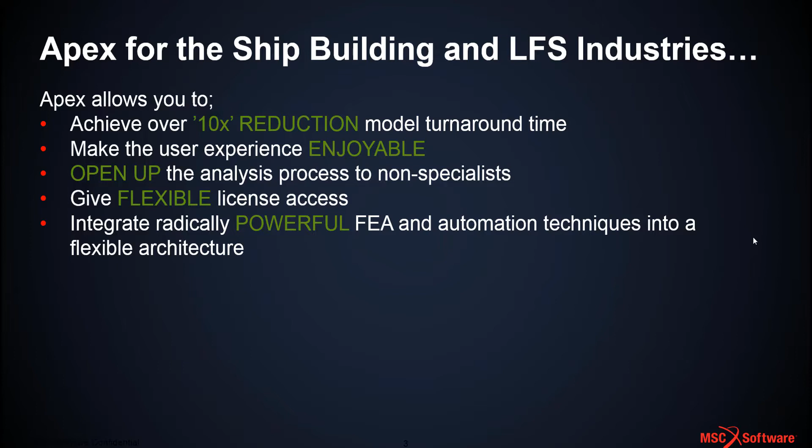There are many patented technologies in Apex and a rich suite of scripting, customization and automation technology available through the flexible architecture. These capabilities are very prevalent in the model build, analysis and general FEA requirement across shipbuilding and the large fabricated structure industries, hence the importance that robust FEA has within this development process.

That said, Apex gives you the design freedom to develop your current and future products in a manner you have never seen before, mainly focused on the power of Apex coupled with the massive efficiency gains that you can get.

So the Apex journey so far: the original releases were based on CAD to mesh, so easy to use, faster to build models and faster to update models.

Then with subsequent releases we moved into the ability to go from CAD to results by relying on the embedded Apex structures solver technology, which allowed us to go round the design iteration loop to build and analyze your products quicker.

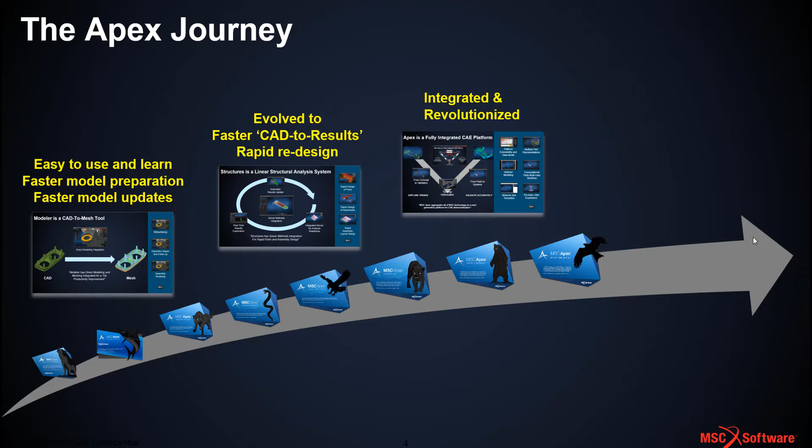Then with later releases we saw the introduction of the Python application program interface, the API, which means that Apex is now fully controlled and customizable through that Python automation.

A subtle change in the messaging or push for Apex has been to change the paradigm from the embedded Apex structures solver to the MSC Nastran external solution by the Apex Nastran gateway. A number of interoperability enhancements are all enabled through the MSC Apex Iberian Lynx release.

So workflow maturity: legacy approaches looked at other tool sets, so Patran or third-party tool sets for both pre and post processing, wrapped around the MSC Nastran process.

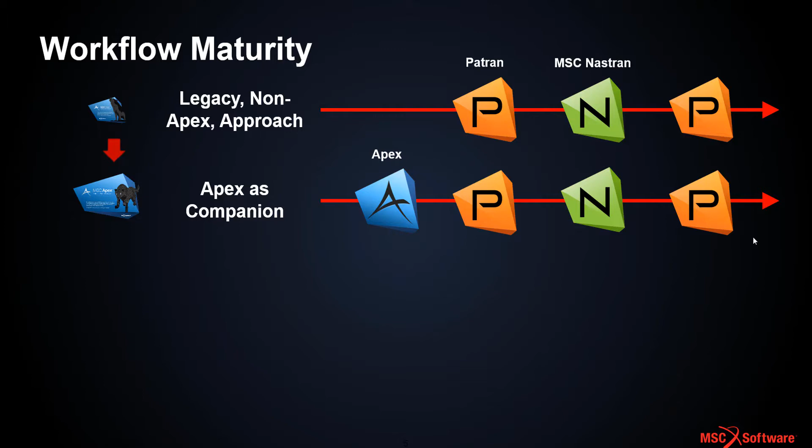As Apex came along, it was originally used as a companion tool to allow Apex to build models in a partial sense, for then import into Patran or a third-party tool for continuing pre-processing, then Nastran, then external support for post-processing.

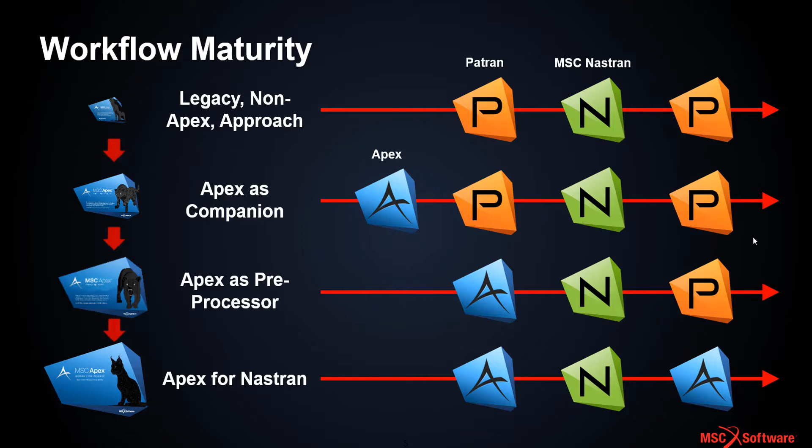As Apex has evolved, it's now, or has been, a fully defined pre-processor, but still relying on Patran or a third-party tool to do post-processing. But now with Iberian Lynx we have the concept of Apex for Nastran, where we can build and explore our results, post-process Nastran all in a single wrapper environment without the need for anything else.

So functionality growth: as an original companion tool, we had some level of keyword support which has grown in subsequent releases. We've had Apex as a companion tool where we can set up the jobs and solution types for external Nastran post-processing.

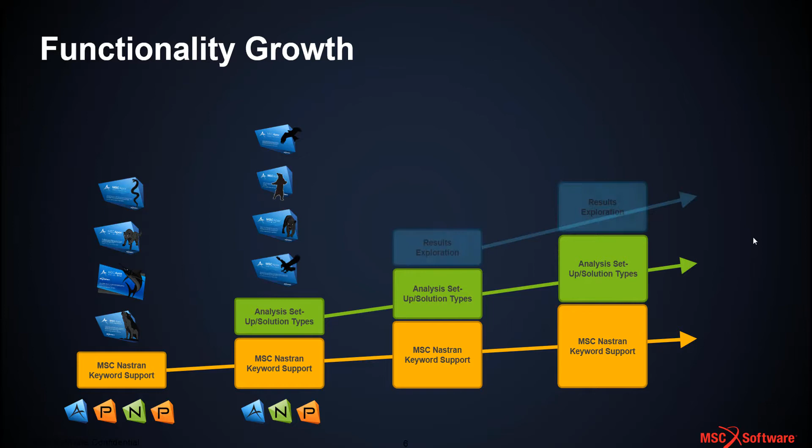The advent of Apex Iberian Lynx has meant that we are now fully supporting results exploration, so we can post-process Nastran result files and result data in a single Apex environment.

We've also got the ability to deal with orphan mesh, which means we can now take legacy Nastran bulk data files, read them into Apex, manipulate and modify them without the need to rebuild from the original geometry.

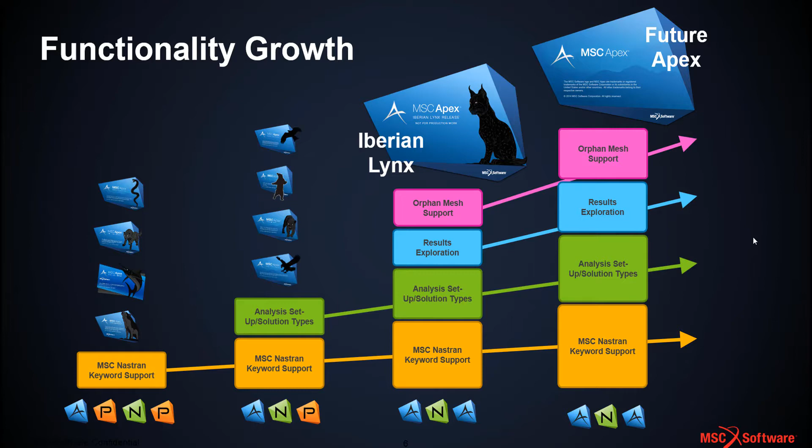And as Apex develops into the future, with a couple of service packs and another significant release planned over 2019, we've got a lot of technology coming in which will further improve these functionalities.

So how can Apex improve your productivity? The key thing now is that Apex is implicit within your MSC Nastran workflow, so you don't need to rely on anything else in terms of your model build for the bulk of your FEA development process.

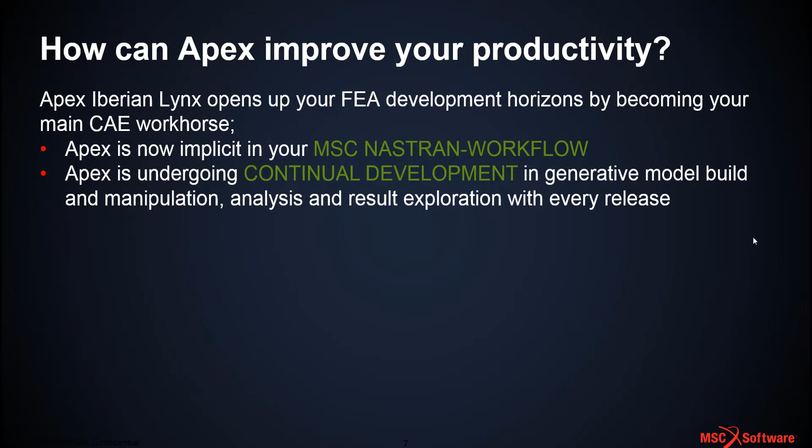It can become your main CAE workhorse. Apex is undergoing continual development in terms of model build, analysis and result exploration with every release.

The Python-based automation now supports build, but also analysis and result exploration, which is new to Iberian Lynx. We've also got the ability to customize the graphical user interface through a user-defined tool, enabling the user to develop and access their own form and graphical user customization.

Apex's current and future development is driven by a desire to address the key industry pains that we see with contemporary development environments, allowing you to experience the full benefit of an Apex-focused workflow. Let's get started with a couple of examples of some shipbuilding and large fabricated structure analysis, some build types.

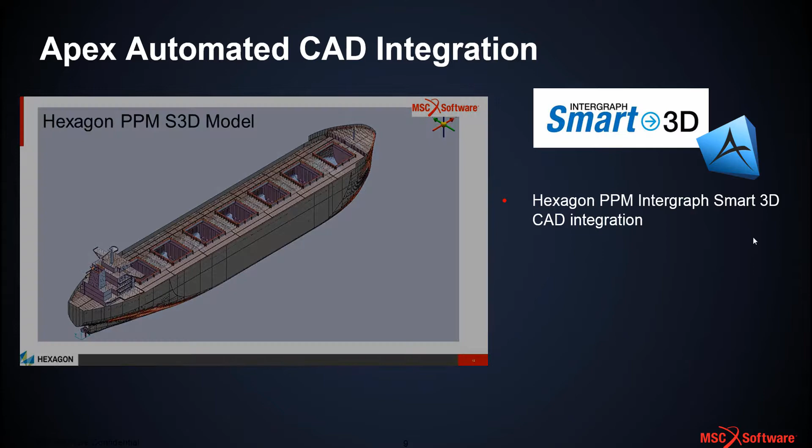So let's get started. Looking at Apex automation, we've got an example here where Apex has been automated with CAD integration. The Intergraph Smart 3D tool, the geometry CAD tool, is now fully built into Apex with a Python automation. We can now read in geometry via a Python script.

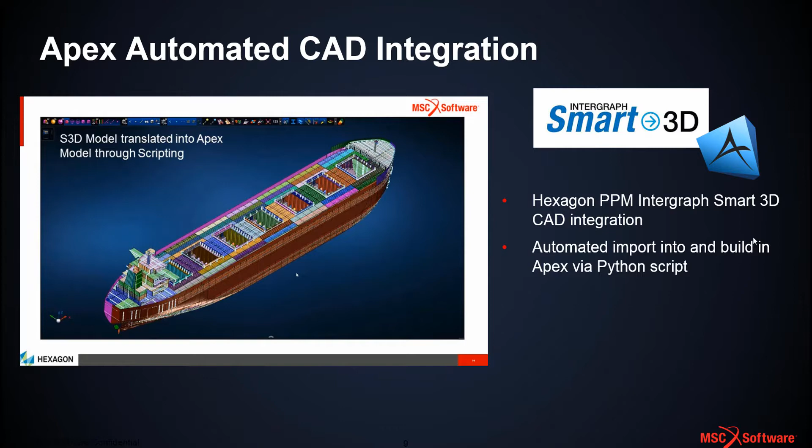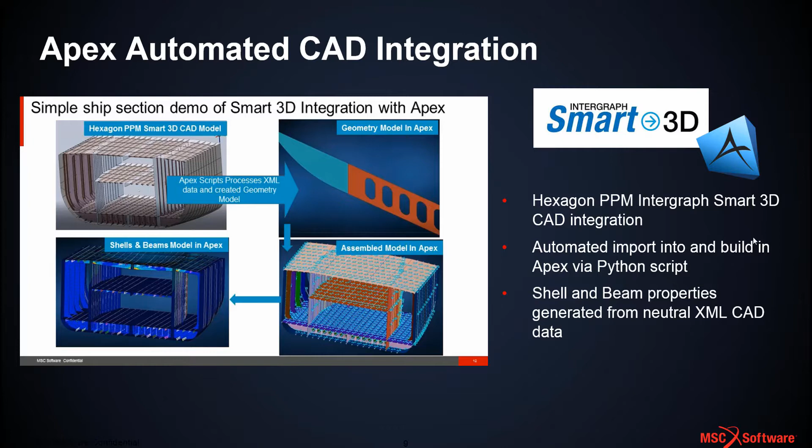We can develop our shell and beam properties from a neutral XML CAD file direct out of Smart 3D, which means we can build geometry, assemble that model within the Apex environment, and then run our analysis for subsequent linear static and buckling analysis. So the movie playing on the left hand side, we can see how the geometry is read in and manipulated.

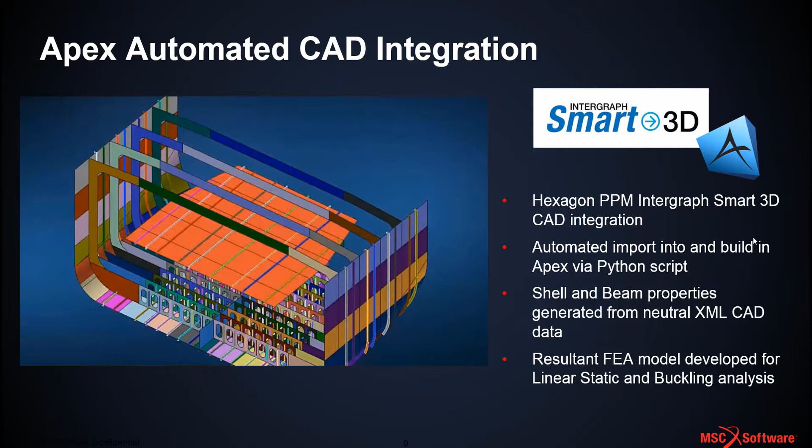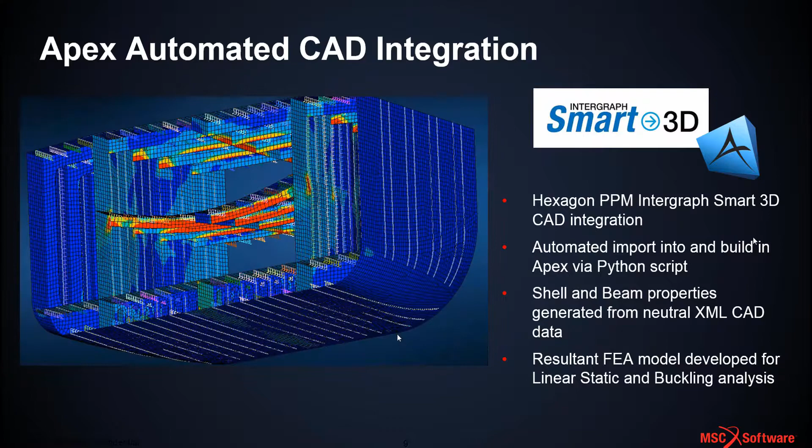We've got 2D shell elements and 1D bar elements that represent the bulk of that global type ship structure. A very complex model build that can be automated very easily to give us the output that we need. Just looking at a couple of shell and bar response in terms of that definition.

So the Apex Nastran workflow. Apex is fundamental in terms of your Nastran based workflow with enhanced keyword support for both model import and export, and also at the other end, the post-processing end, we've now got HDF5 result interrogation to take advantage of the powerful results exploration within the Apex environment.

We've got multiple keywords supported now. The infographic on the left hand side shows how the number of supported keywords for coordinate frames, multi-point constraints, materials properties, model definition and loads and boundary conditions has increased from one of the early releases, Diamond Python, through to the contemporary Apex release, Iberian Lynx.

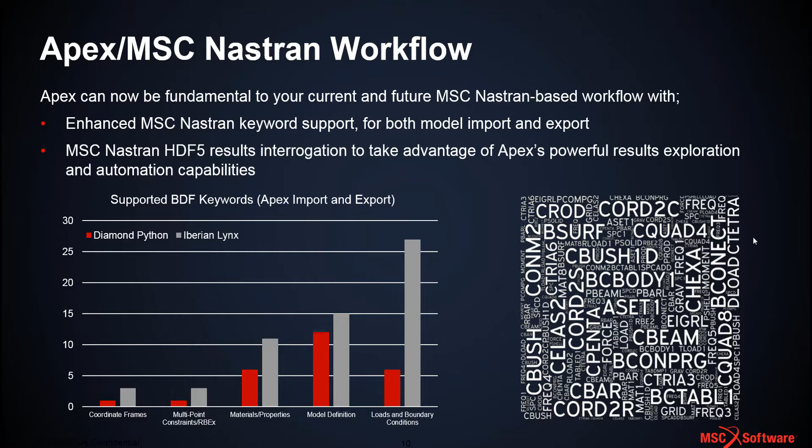And then the word cloud on the right hand side just shows some of the keywords that are supported, just to give you a flavour of the breadth of support that Apex now has.

So in terms of the Apex Nastran workflow, again we've got a complex model that's been brought in from the Intergraph environment in this example. The 3D geometry has been broken down into 2D surfaces and 1D bar elements, or 1D curves to support 1D bar elements, and we can look at specific zones within that model just to give an idea of the complexity, and Apex can handle the model build and assembly connection within that environment.

So we've just broken out a portion of the ship hull. This demonstrates a typical global workflow whereby we build a model, we create an analysis scenario, and then we can export that model out to the Nastran solver, an external Nastran solver, so we can take advantage of

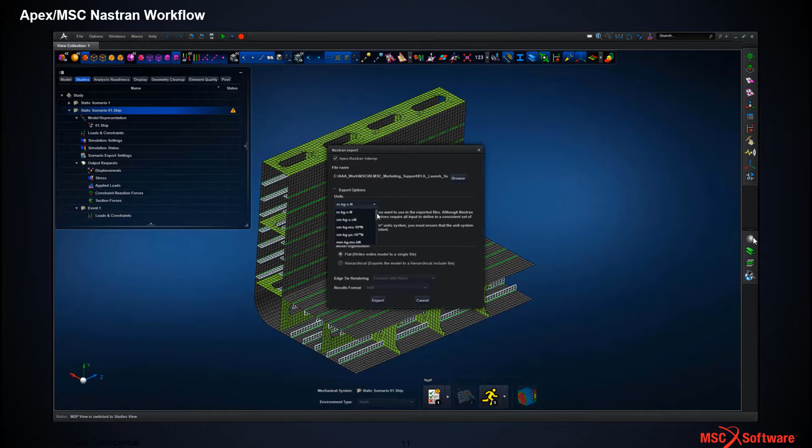maybe a high performance computing environment where we don't want to solve on our local machine, or we've got some requirement to run MSC Nastran from a certification perspective. So we can run the job externally,

obviously sped up in this case, well, a fairly small model anyway, read the results back in, and then we can post-process using the standard MSC Nastran, standard Apex result exploration tools.

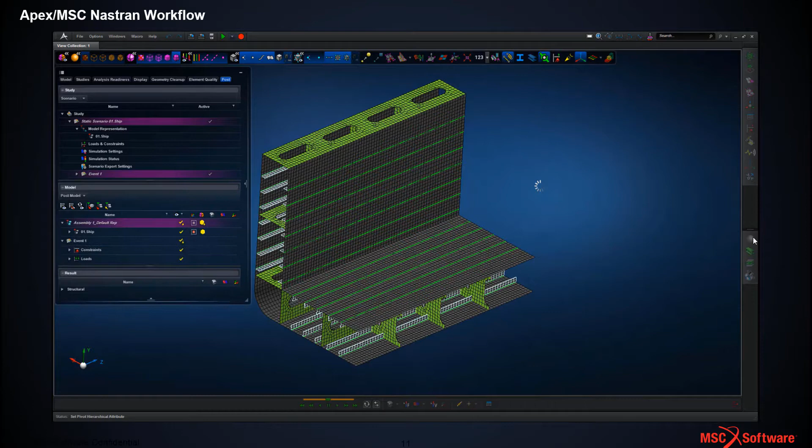So just bring those results in, and we can see a deformation and a stress plot, both in terms of the shell stresses, but also the 1D element stresses as well.

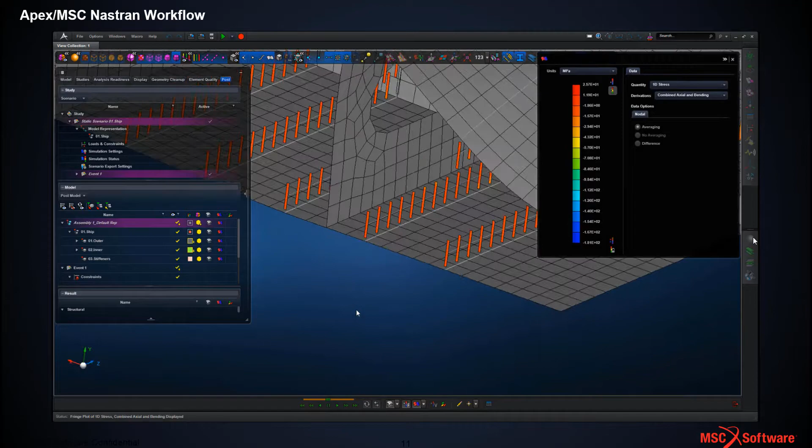Just switching from 2D to 1D stress for the combined axial and bending stress, showing the 1D display, and those are the equivalent stresses developed across those stiffeners.

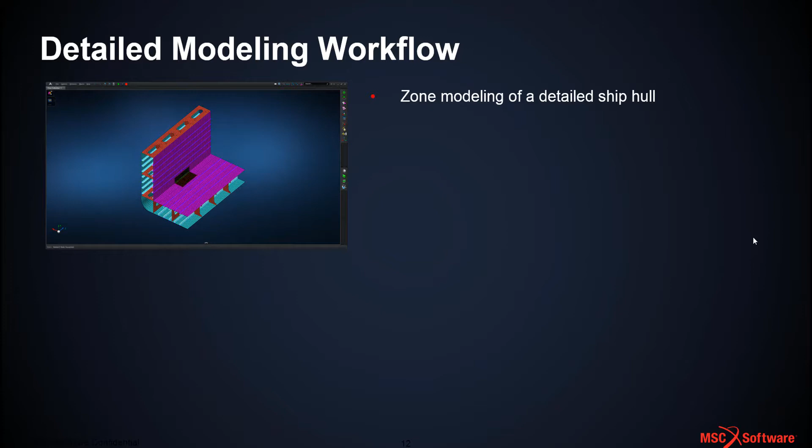So moving on to a detailed modelling workflow. We're going to look at zone modelling of the detailed ship hull, but we're going to break out, again using the orphan mesh workflow, coupled with an external MSC Nastran analysis.

We're going to build a local weld zone, which is then grafted into the global FEA model, but gives us the local hotspot stress distribution to support the weld types as we see them.

So we've got a number of connection techniques to connect dissimilar mesh regions. These consist of edge tie, glue and discrete ties, potentially with the aid of the Python automation toolset that we've mentioned. This is a powerful technique to hone the analysis, so you could run the global model, look for hotspots,

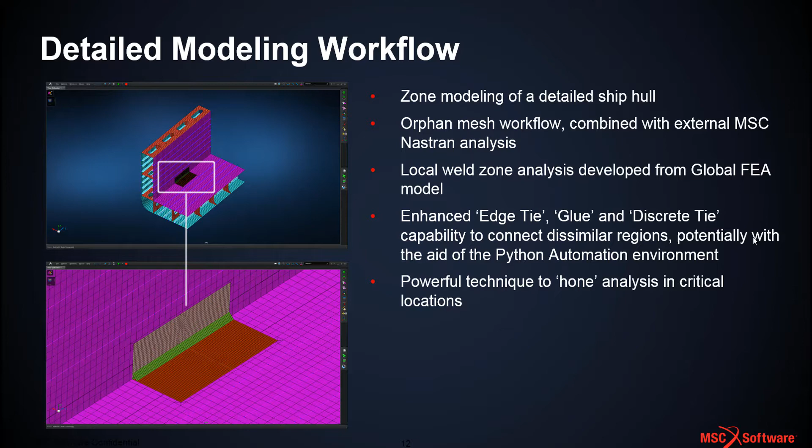and then using the direct modelling CAE capability and the generative model build within Apex, we can further refine the joint area detail to give us the converged stress response that we would need at that level.

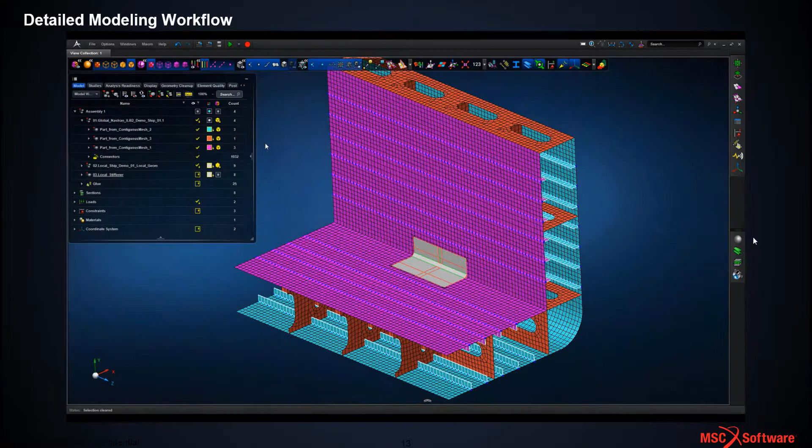So we've brought in this orphan mesh, so we've got no geometry in the model at this level, and we break out a region of the substructure and the plates which support the substructure. We've used the orphan mesh tool sets, and we'll cover that later on in the webinar, but just to give an overall view of this, we've used the orphan mesh controls to generate the local detail and the local weld regions.

We've got chamfers defined at the weld throat, and then we can graft that back into the global model, again using a glue definition at this stage, and then we can run the Nastran solver, or use the embedded Apex solver to run the process and then read the results back in.

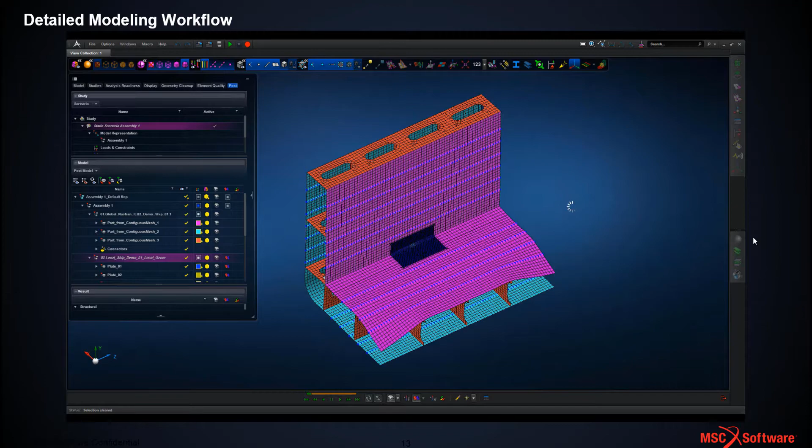So a similar global response to what we looked at previously, but then of course we can zoom in on the local region and run those results and see the hotspots specifically at those weld interfaces for our weld fatigue analysis or anything else we might want to perform from a downstream perspective.

So that said, we've now got multiple ways of dealing with hybrid structures. Large fabricated structures can often have hundreds if not thousands of components within an assembly architecture. So Apex can deal with those external CAD import processes and respect within the model browser tree the assembly, sub-assembly and part definition, respecting the original part IDs.

So if you've got a true read across in terms of parts list or bill of materials across into the Apex environment, which means it's very efficient in supporting model generation, but also querying and showing different aspects of the model to tie back to the CAD design phase.

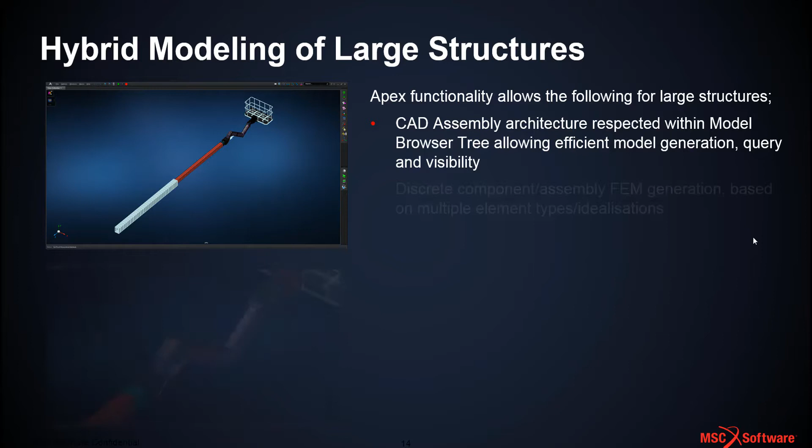We've got multiple element types and idealizations within Apex, so 1D, 2D, 3D meshes which can all be tied together to give us discrete component and assembly level FEM generation.

The Apex embedded structures solver, or embedded solver, is very useful in terms of verifying discrete parts, sub-assemblies and even full assembly behavior, maybe before we apply our real load cases or before we export to an external Nastran solution for that analysis. So again, we've got multiple connection types such as glue, discrete ties and or joints.

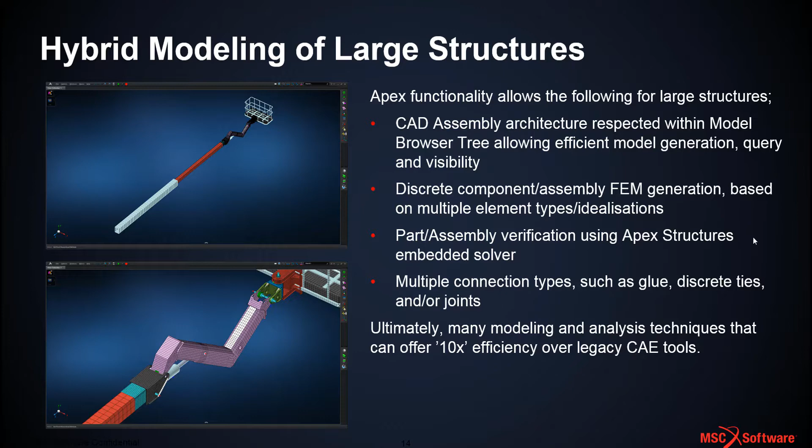Discrete ties and joints are new for the Apex Iberian Lynx release, and we'll look at those in a bit more detail later on. Ultimately, many of these modelling and analysis techniques can offer huge efficiency gains over legacy CAE toolsets.

So we're just going to take a quick walk through for this large fabricated structure, this crane assembly. So we've read the geometry in, and we can see in the model browser tree how the model architecture is defined. So we've got a sub-assembly that covers what we're calling the basket, where the operator might work on this structure.

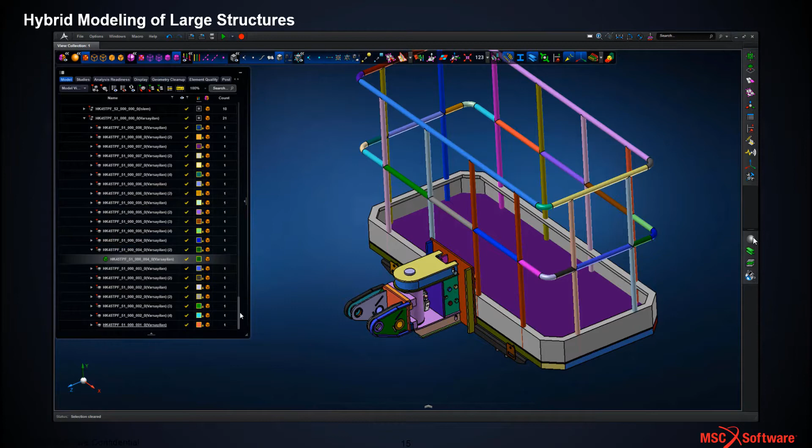We can just highlight a local sub-assembly and just show that in the viewport, and then we can use some of the standard CAD mesh tools within the Apex environment to break that assembly down into the underlying mesh definition or FEA representation.

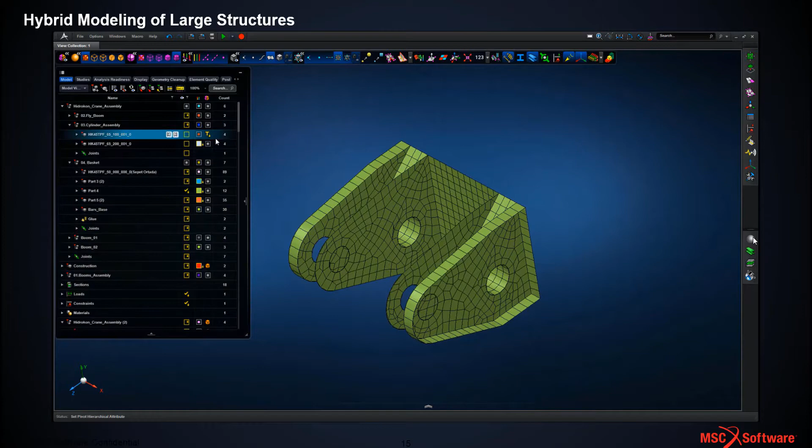Show the 3D equivalent thickness, and then we're going to use the Apex Structures embedded solver just to run a quick verification analysis, typically based around normal modes, a free normal modes analysis, just to show how the structure is tied together. And we can just run that through very quickly, given the size of this model, and understand how...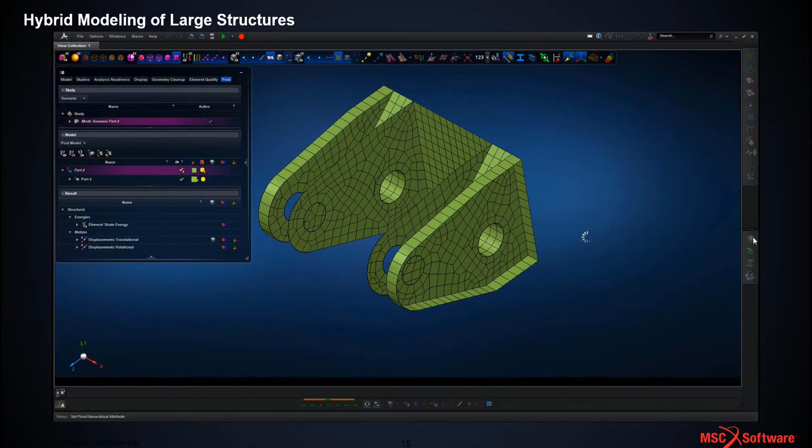...the structure will deform, what those mode shapes look like, where the strain energy hotspots would be, and just to understand whether that model is behaving as we would have anticipated.

And again, because this is embedded within the Apex environment, we're not into an import-export routine to access those results, and we've got full control over licensing and what have you as well. So just a very quick snapshot of how that structure is going to behave.

So once we've got that subassembly verified, we can now look at the larger subassembly, for example. So here we're looking at the basket in its entirety, so just hiding the showing all of that structure and then hiding the geometry and showing all mesh types.

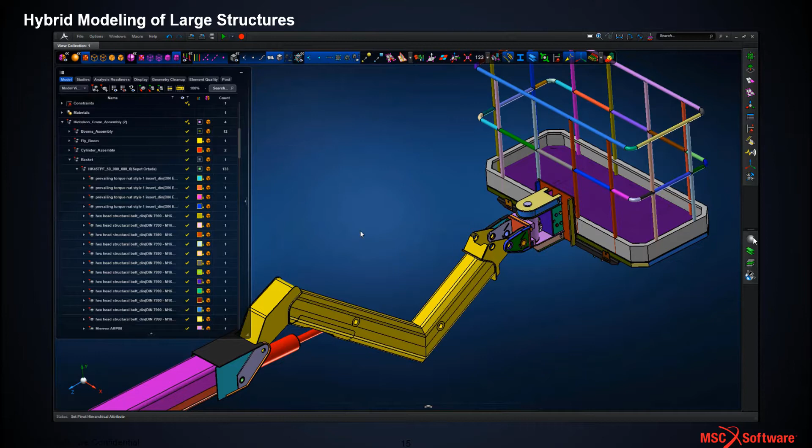So we've got 1D, 2D and 3D elements here, all grafted together using glue and or discrete ties, and then looking at the larger model build. So we've got a number of different idealizations to represent different parts of the structure.

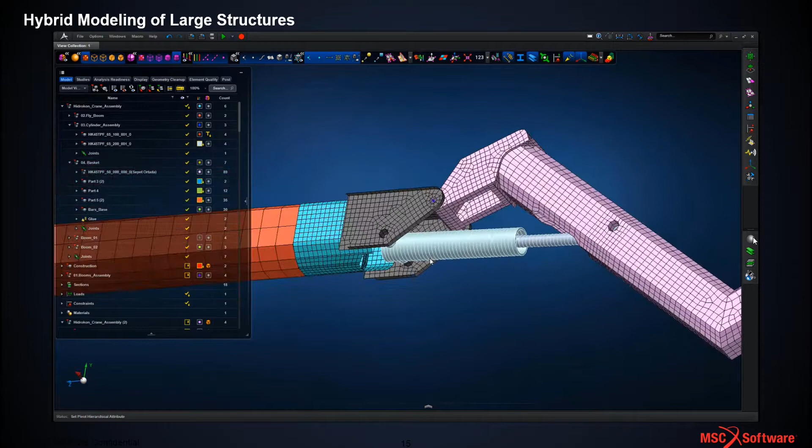So depending on where our hotspot might be or a region of interest, we may choose our mesh fidelity in a given way. So here we're looking at the arm shown in as the pink region, how the stresses would develop in that. So again, 1D, 2D, we've got a transition from a 2D coarse to fine definition here, which we're going to glue together.

We've got one of the booms shown as shells and the other one defined as a one-dimensional beam element. So if we turn the beam section display off, we can see that 1D beam element. We've got a joint definition that represents a slide between those two entities.

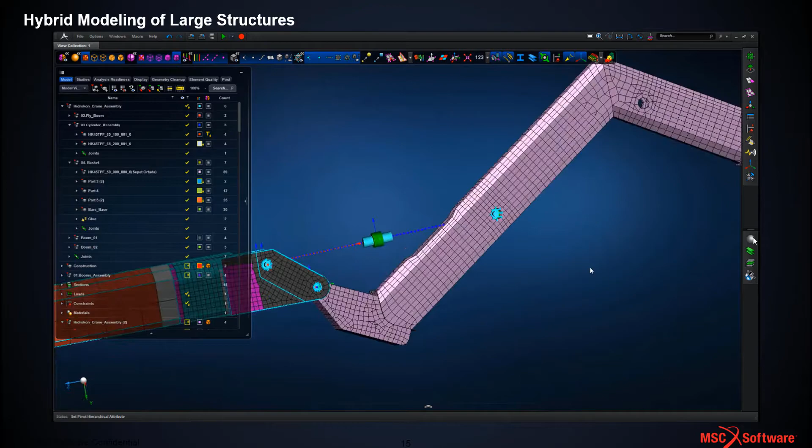We've got a couple of other sliding and revolute joint definitions that can be used for our mastered load transfer across these interfaces. We've got glued contact here between 2D shells and 3D solids. Again, very quick means of bringing those entity types together.

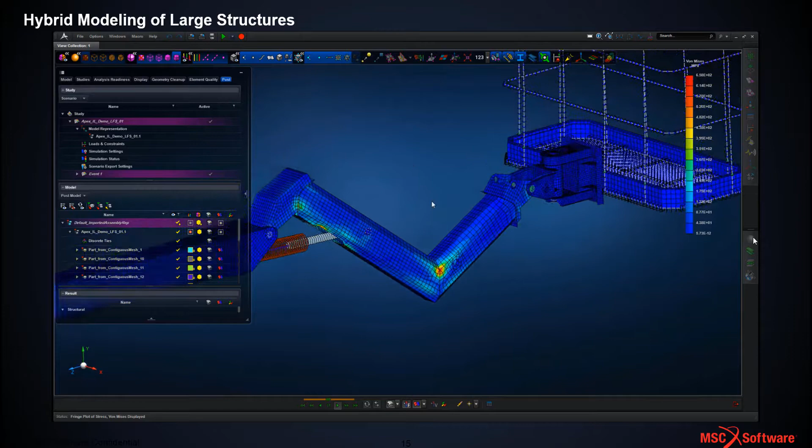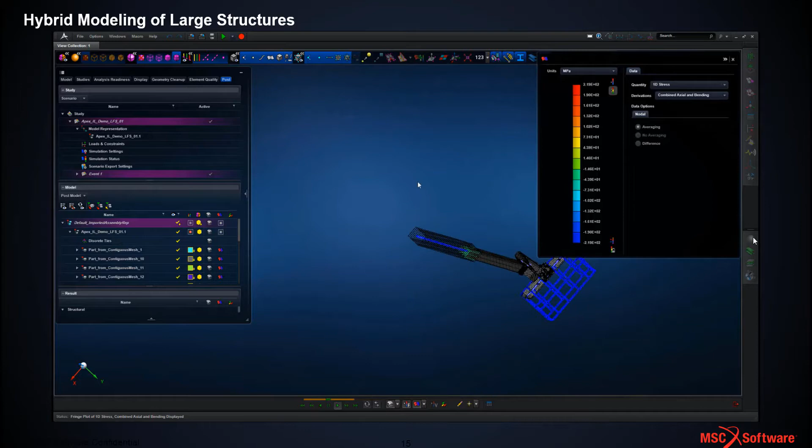We can run our analysis, look in post-processing and hotspot our peak stresses. We can see peak stress developed at this weld interface for this fabricated structure. We could hone in on that analysis, looking at some of the 1D stresses shown as a three-dimensional display across the section for combined axial and bending stress, and hotspot those 1D entities. We can see a 1D bar representing a rod or cylinder type structure where we've got some local hotspots, and that concludes the hybrid modelling.

So we've got multiple techniques for how we can work with that within an Apex environment.

Solver capabilities: the Apex IL/MSC Nastran workflow supports linear static, normal modes and linear buckling. This is an example of a typical workflow, given that we've now got the embedded Apex structure solver and the ability to work with externally solved Nastran information.

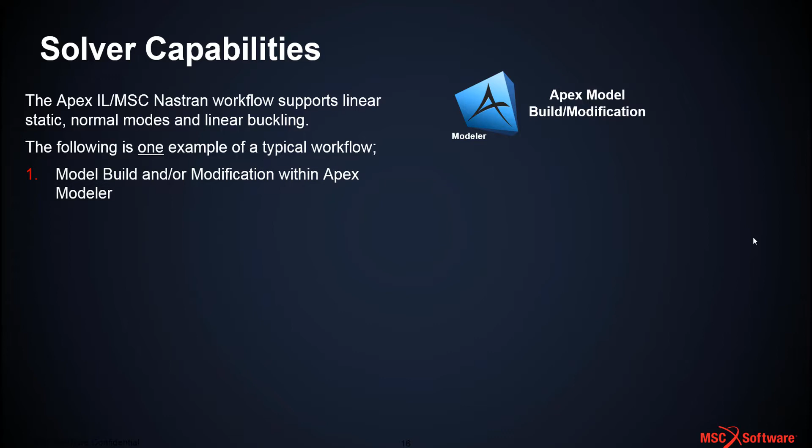We could build a model within the Apex modeler environment, then incrementally verify the model, especially for large assemblies with multiple parts, using the internal or embedded solver with the Apex Structures license. Once verified, we can export the model as a BDF file to an external MSC Nastran run to develop our production-ready results, and then post-process those MSC Nastran results again using the Apex modeler environment. So full control over the model build, verification, analysis and post-processing.

Some of the discrete enhancements we've seen within this Iberian Lynx release include a number of geometry enhancements. We've seen this certainly in terms of lofting, but we now have more mature, more evolved CAD type tools such as revolve, extrude, sweep and lofting, which comes in very handy.

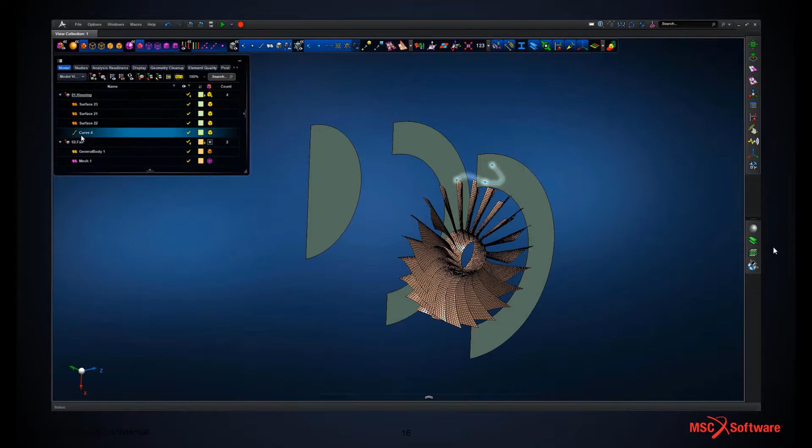Looking at this quick example, a simple jet engine cowling: we're going to revolve the curve at the front we've just highlighted, then spin it around an axis, taking advantage of the Apex magic markers, which effectively allow us to pick things like endpoints and arc centers on the fly.

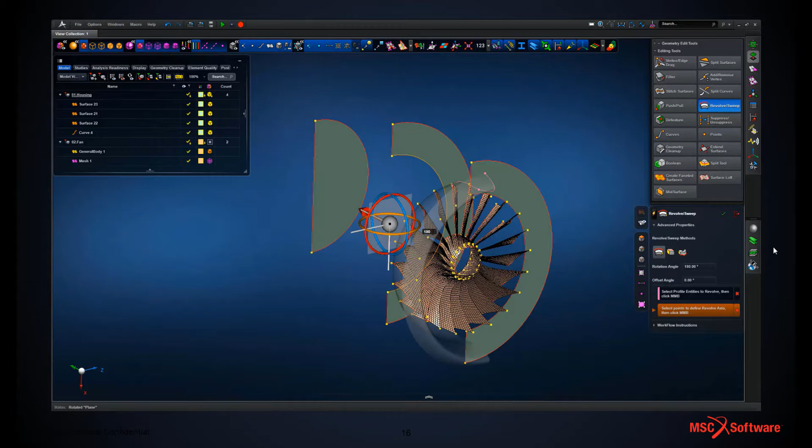Using the rotation axes, we've got full manual control and can see a preview of that surface. Middle mouse button to accept, and we've got the front of the engine cowling revolved around to give us the surface on screen. So we've got the front of the structure built.

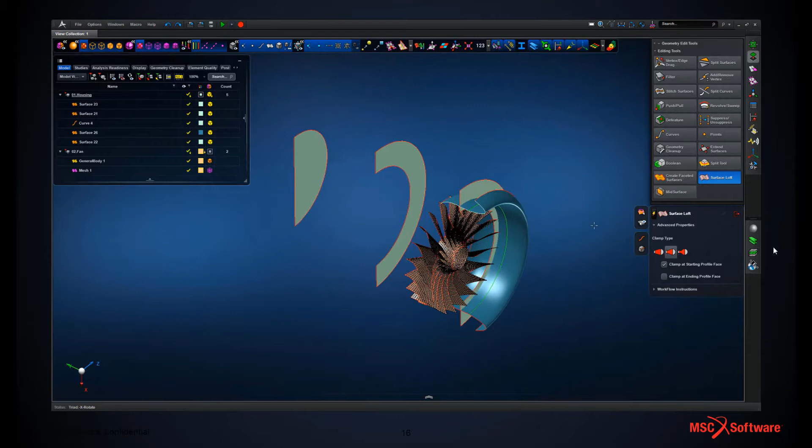We're now going to look at lofting a surface, picking a series of non-connected curves and building a surface that passes through those curves in a spline sense. We've got full control over edge continuity and edge tangency to give us the structure that we want.

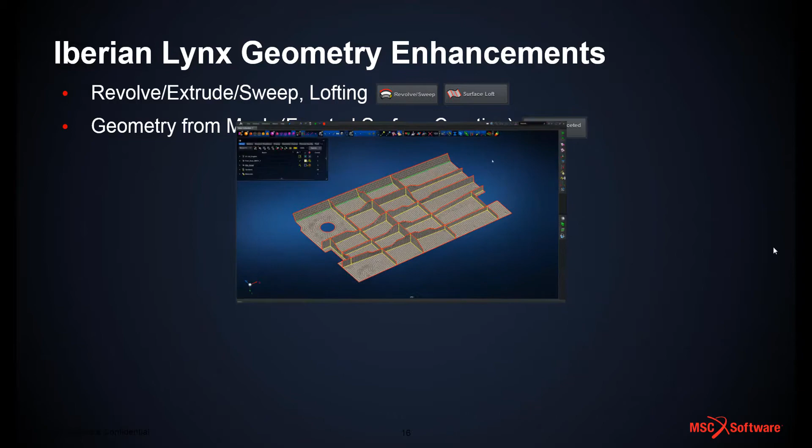Geometry from mesh, or faceted surface creation, which we'll look at with a simple example. We've read in a bulk data file. We've got no geometry, but we can check the shell thicknesses and look at the topology. What we're going to do here is modify the bulk data file to give us a solid mesh region.

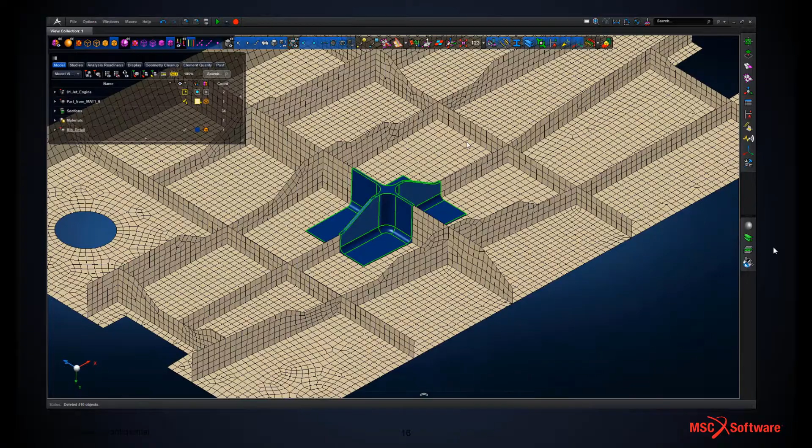Conventional tools would be quite difficult for this. So what we're going to do is break out the shells in the region where we're going to replace them with 3D elements, take them out so we can see a hole in that mesh topology.

Once we have the mesh we want to work with, we're now going to create faceted surfaces from that mesh. Pick the mesh, middle mouse button to accept using the defaults in this case. It's built a whole bunch of surfaces created from those original shell elements.

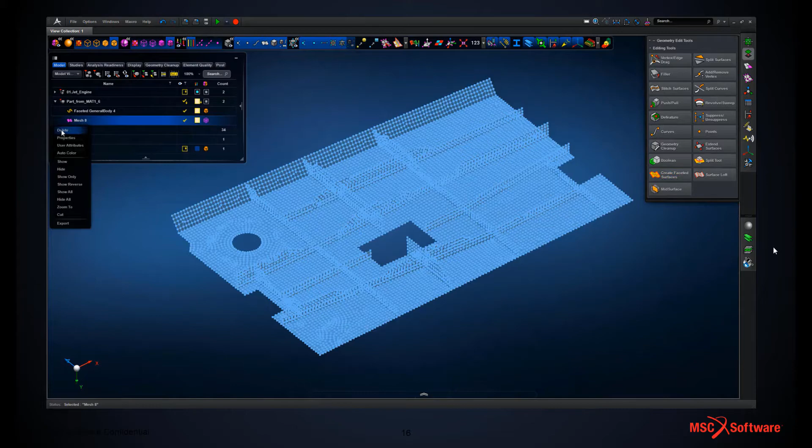Of course, this could be done in an automation sense. We've got flat surfaces here, but it would work equally for curved surfaces. We've remeshed the structure using a new element edge length, and we've got full control now with this faceted surface geometry if we wanted to generate further modifications, so we could seed that surface if necessary. Key here is that the faceted surfaces remembered the underlying shell thicknesses, so we don't need to repropertize. That's taken care of.

So we've dropped in a portion of 3D mesh geometry. We can glue those components together using the standard glue connector technology, and then run the model. A very quick way to work with orphan bulk data file definitions and modify or introduce new geometry as required.

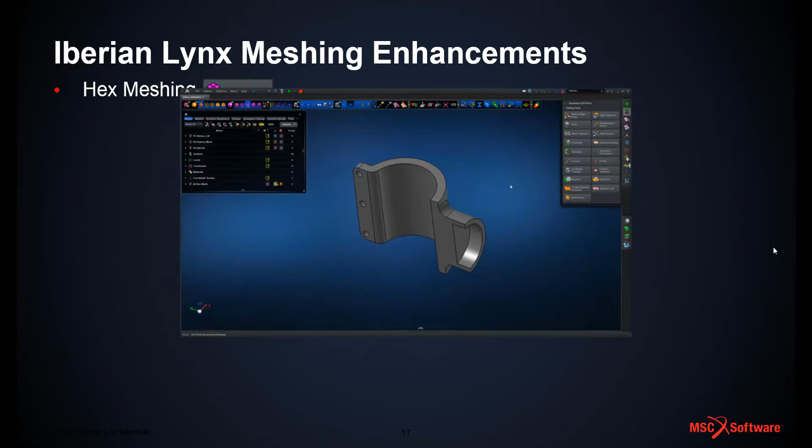Some of the Iberian Lynx meshing enhancements: we've got the concept of mesh diagnosis, or meshability, introduced in this release. Looking at a quick example of a tube interface, the tube bracket, we can 2D mesh that, or 2.5D mesh, hex mesh that, but some of the element quality isn't that great.

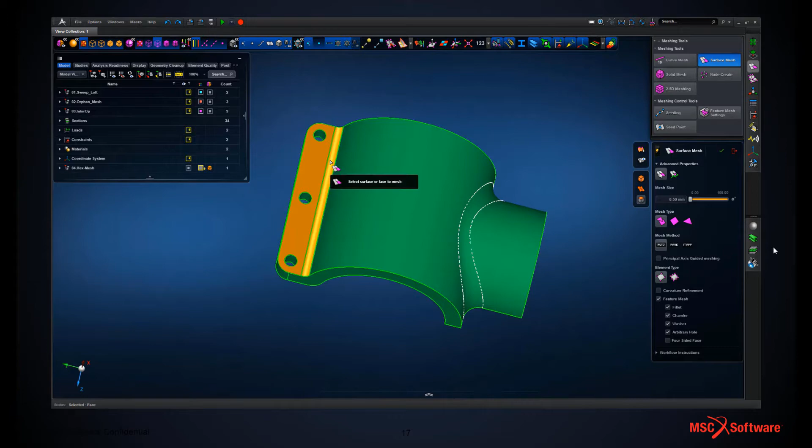So we're going to look at surface meshing these faces to drive the underlying hex mesher in the regions shown, with a different mesh across a different region. Now we can see the fillet regions turned yellow, which means we're not able to mesh that.

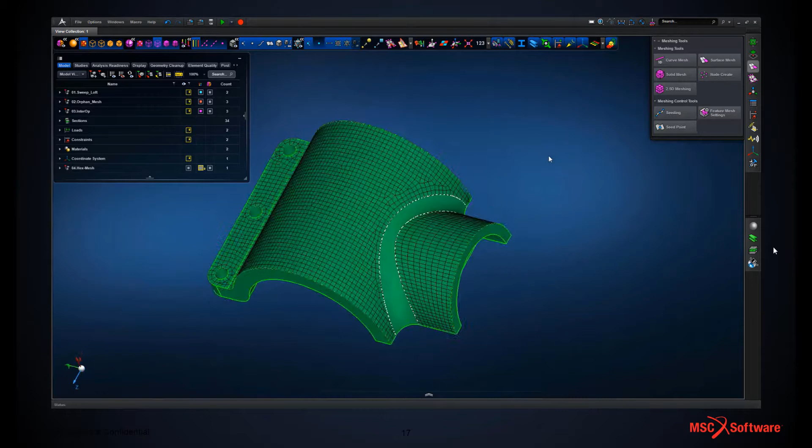So we can use the diagnose meshability tool and see we've got a mismatch in the edge seeding in this region. We can just match those seeds up, and the solid turns green again, meaning it's hex meshable. We can hex mesh the whole thing and do a quick check on the quality, giving us a very good quality hex mesh defined very quickly using that mesh diagnosis tool within hex meshing.

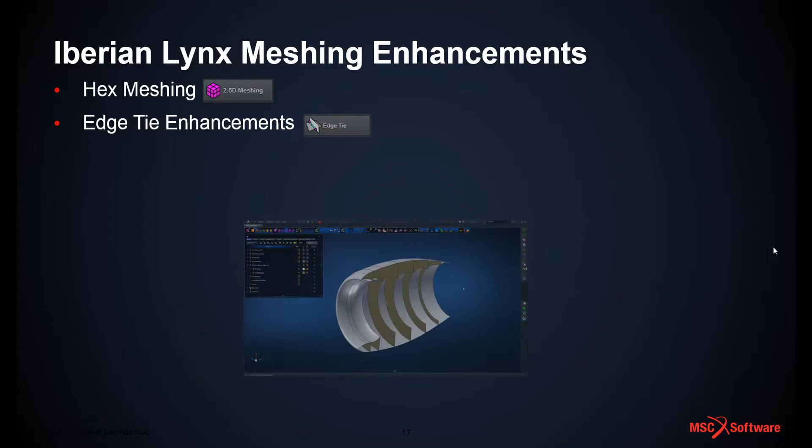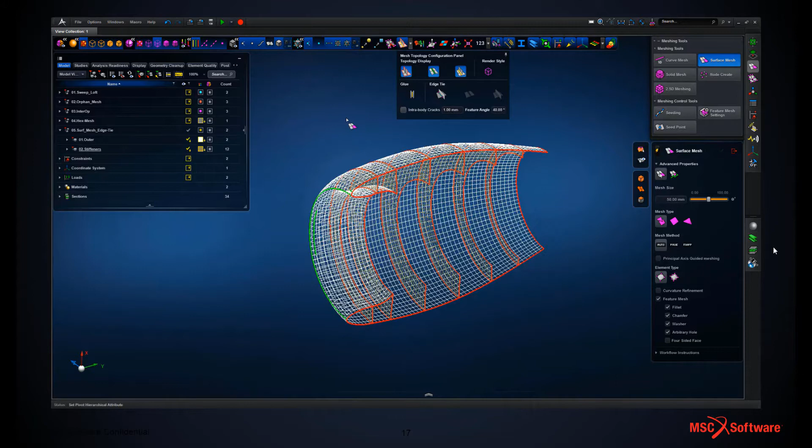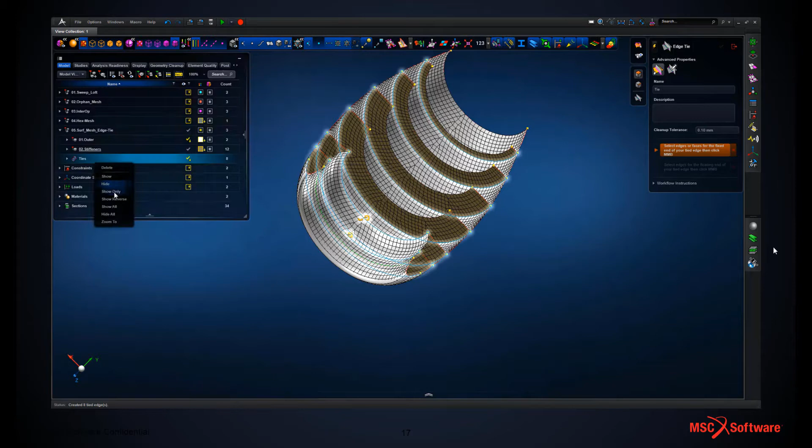We can look at edge tie enhancements. So again, we're looking at this jet engine cowling. We might have some internal stiffeners in a separate part sub-assembly within the Apex framework or model database, and we can see we don't have mesh congruency at those interfaces, while still maintaining the unique part definition. Rather than merging all these into one part, we're keeping them separate, but we need to use the concept of the edge tie to tie these discrete regions together. We can do that, just wait for the mesh ties, and now the meshes are tied together between those discrete parts within the sub-assembly or assembly architecture.

We look at the edge tie on its own. For Iberian Lynx, the big change here is that we can now mirror, transform, or modify those edge ties as a function of the total model. So we're just going to rotate or mirror that model round, and then look at the resultant edge ties that are generated. It's mirrored the edge ties as well, so we've got full mesh control at that level, and then we can run analysis for the fully tied model just to show the local behaviour.

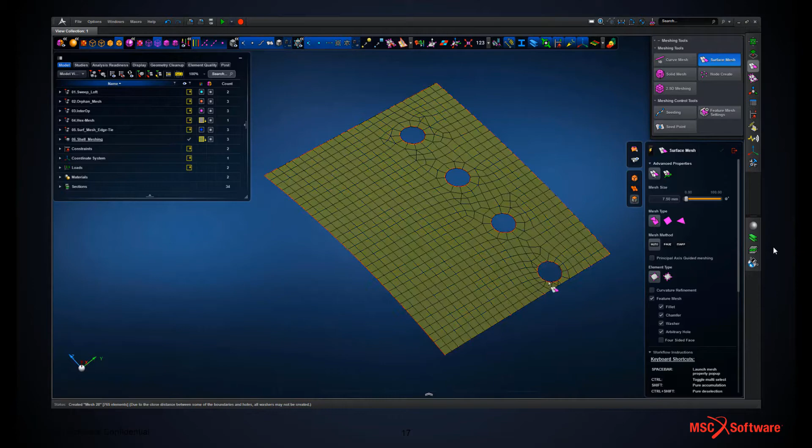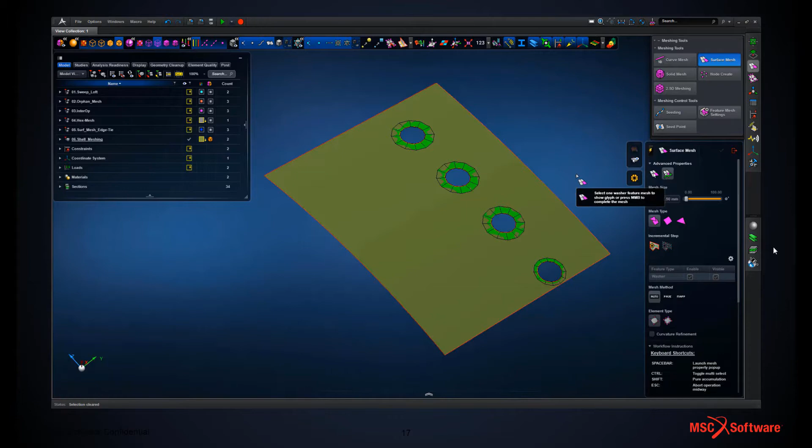Incremental surface meshing, and then some of the shell orientation modifications that have been introduced. We can look at this quick example, so we've got 4 holes in the surface. One hole is very close to one of the edges, so the standard feature mesh definition hasn't been defined for the hole near the edge. Using the incremental surface mesher, it will mesh the features as it sees them. Here it's found the hole, shown it in red, and says we can't fit that washer in, so we can change the washer width, decreasing it for that single region, and then remeshing the whole structure, and those features are preserved within the full mesh definition. We've got the ring of elements as required.

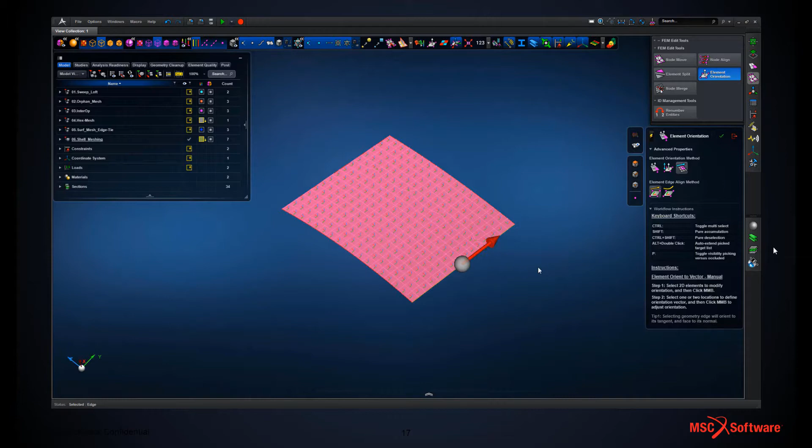One thing which is very important in an aerospace environment, especially if there's going to be downstream hand calcs, is to ensure element alignment for a given region. So we've got shell elements here with the x-axis originally pointing parallel with the long edge. We're changing those now so they're all pointing parallel with the shorter edge, just a simple rotation of those element XY orientations to make sure we've got element consistency, or result consistency, in those XY directions.

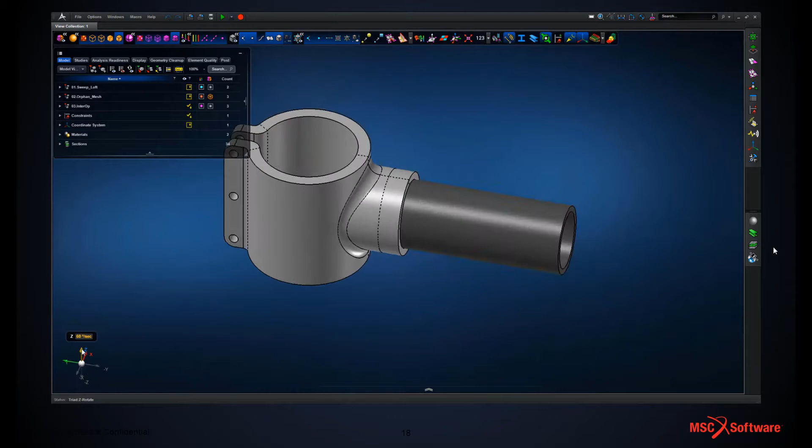Nastran Interop Enhancements: we've got ID management, the ability to renumber entities, and coordinate system definition. We've got discrete ties now fully supported, so that's RBE2s and RBE3s. We can look at this quick example, so we've got again this tube into a bracket scenario. We've got the hex mesh as shown, and then a bar element representing the tube with its equivalent section shown. We can use the renumbering, so we're going to renumber the nodes and elements for the hex mesh region, or the hex mesh part within the assembly. Accept the defaults there, and then we look at the exported bulk data file and look at the element and grid IDs, shown in the 10,000 series as defined.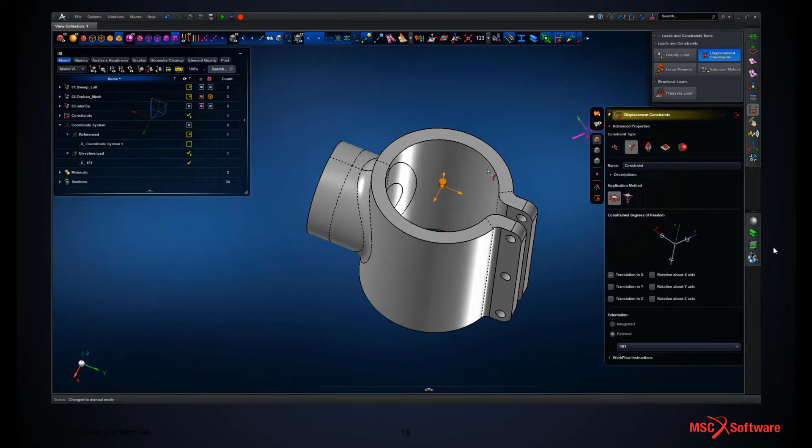We can create coordinate frames explicitly, so we're creating a cylindrical coordinate frame parallel with the axis of this tube and defined at the central point of the tube. Once we've got those coordinate frames defined, we can renumber if we wanted to, and we can apply loads or boundary conditions. Here we're constraining the internal faces of the tube in the radial direction of the cylindrical coordinate system, just picking out the faces. Again, very quick to do within an Apex environment. Middle mouse button to accept, and we've now got that boundary condition defined.

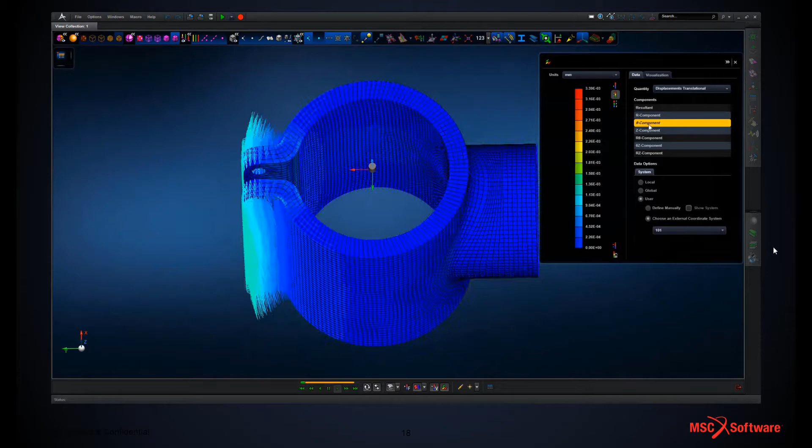We can use a discrete tie, so we've got rigid RBE2 or compliant RBE3. Pick the faces of the geometry, and then pick the center point of the bar element, or the endpoint of the bar element, and it creates those ties explicitly. Again, this is generative, so if you change any dimension within the model, the mesh and those tie and even the coordinate frame definitions will get updated. So we can post-process in that local system, changed to an externally defined coordinate system, and then we can look at the R, theta and Z displacements. Vectors are shown on screen now, and we've got full control of that coordinate frame definition.

We've got the concept of joints within Apex Iberian Lynx.

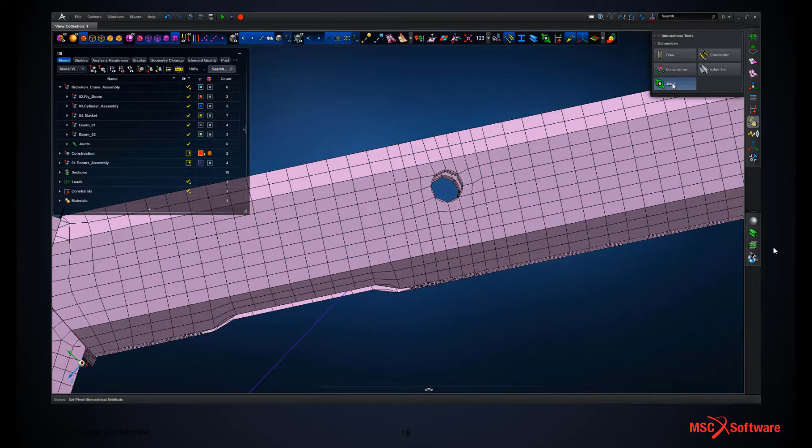Rather than manually building coordinate frames, local grids within particular coordinate systems, and then tying all those together with RBE2 or RBE3 elements, we've now got the concept of joint, which effectively does all of that type of build and connection within a single Apex environment, or a single Apex function.

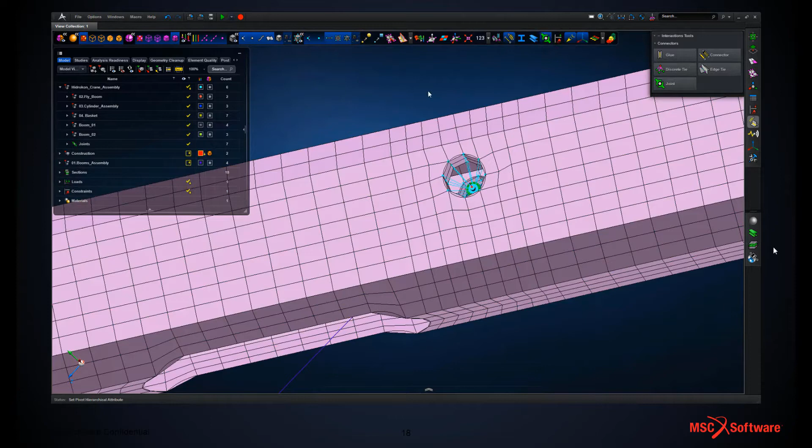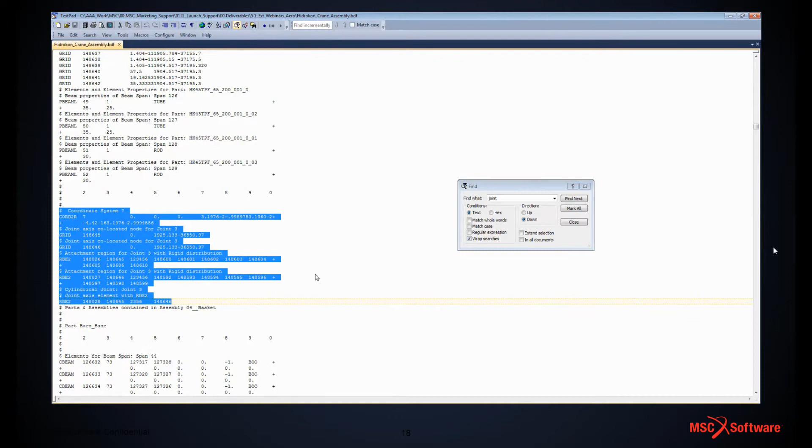Here we're building a cylindrical joint, which effectively allows rotation about the axis of connection and connects the shell structure into the local bar structure. Those entities are developed in the model browser to see the specifics, or to modify them as necessary. If we look at the resultant BDF file that's written out, we can see the local grids, coordinate frames and connectivity that's defined.

And obviously the Apex solver gives us that response as required. We've got result exploration, so we've got the ability to import Nastran HDF5 result files to probe those results using 0D and 1D probes to develop scalar, vector or tensor plots at particular locations, or even over a path, a curve drawn on a model or mesh.

Finally, within this Iberian Lynx release, we've now got the ability to write out those results to an external CSV format. Let's look at this structure to show how we could export the bulk data file. We can look at the bulk data file that's created, and do this on a single file or include file definition.

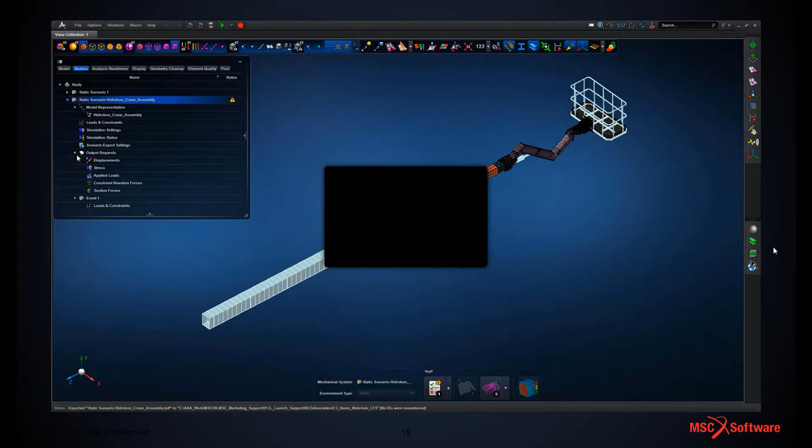We can run the Nastran result, or generate the Nastran results externally, and then read that HDF5 file back into the Apex environment. Just bringing that in, importing the results, and the results are brought in successfully.

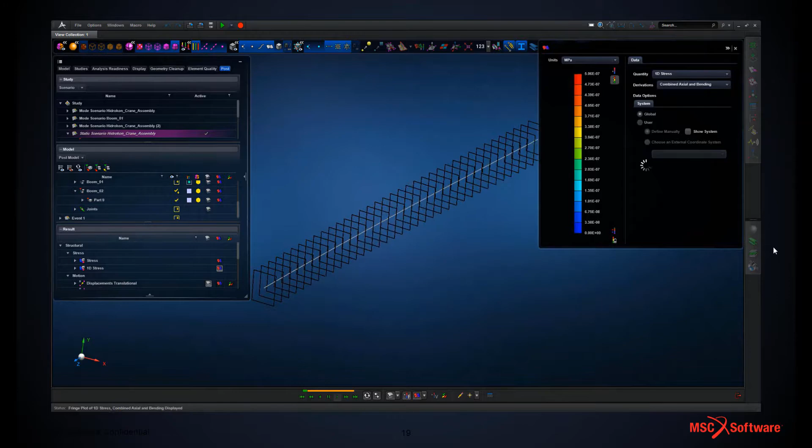We can now post-process. We'll look at a quick animation of displacement, and then at discrete results. In this case, we're looking at the beam element section outputs based on combined axial and bending stress, and then we use the 0D cursor to pull out discrete results.

Again, this is very visual, so it's very difficult to make mistakes when you can see the output explicitly. We can generate a table of those probe results and modify the table if we need to, and then write that data out to a CSV file for external post-processing if needed.

Some of the Iberian Lynx customization and automation enhancements: we've now included scripting support for both analysis and result exploration. Previously we only had it for model build, but now we can effectively black box the whole process, including analysis and result exploration. We've got the ability to custom develop or define tools within the Apex environment, as we've seen with one of the earlier examples looking at fastener build.

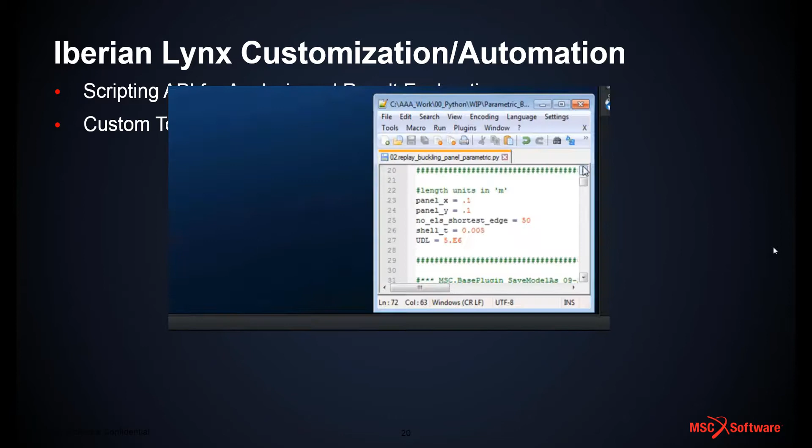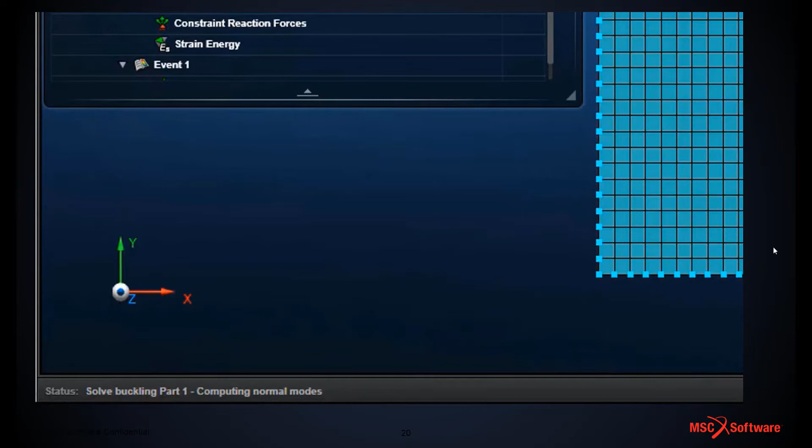We're just going to look at this quickly. Here we've got a simple example, a macro which defines the geometry of a buckling panel under compression. We can run that script, and we're handling the model build - mesh, geometry, properties, loads, boundary conditions - but we're also invoking the Apex solver and result exploration through that automated approach as well.

So we get all the way through from a single click of a run script button to having results in the environment with no manual input whatsoever. This opens Apex up to parametric studies and/or the ability for less experienced engineers to take advantage of the full FEA model and analysis capability.

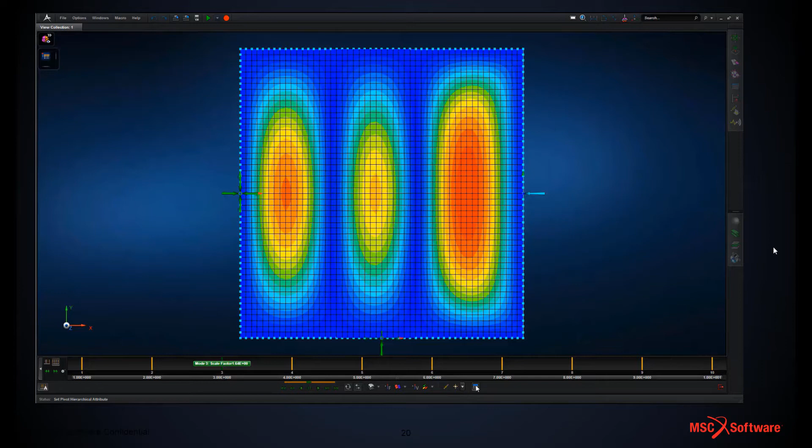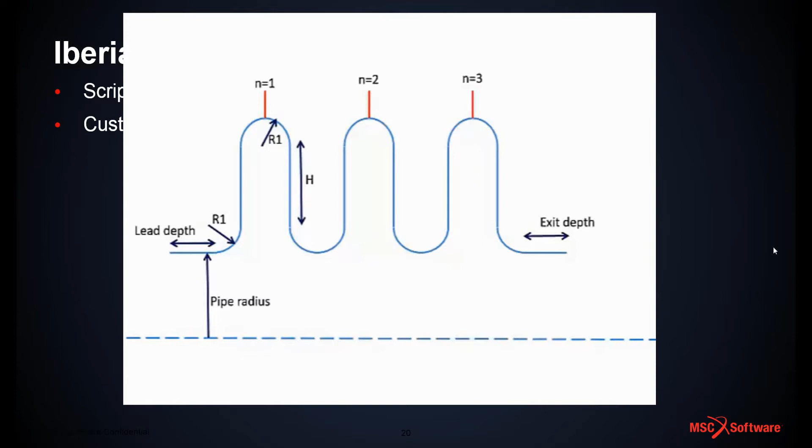So, second scripting example here. This one introduces the concept of the custom tool environment. We've got an Apex script set up, and the custom tool is set up to read that in via the graphical user interface.

So we've got a family of parts here, which we could effectively define based on all sorts of different dimension and model criteria. But once we've got the inputs that we're happy with, we just press the green button to accept the inputs, and then the model runs, or the macro runs and builds the model.

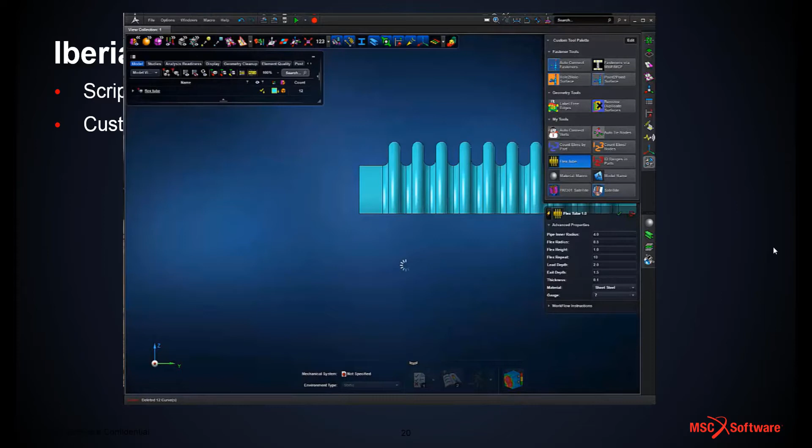So we've got a sort of flexible tube arrangement here: building the geometry, so sketch and then revolve that round, mesh the structure, and then we've built the model completely. We could have in fact included the analysis and result exploration within this script, but we can see the model response based on those initial parameters.

Once we've got this defined, we've got full control of the model. The key thing to say here is that Apex really now is a game changer. There are multiple technologies in the Apex environment, which mean we've got a model build, solve, analysis solve and post-processing capability unseen before in terms of legacy tool sets, and really now it's open to you to use and take full advantage of that technology.